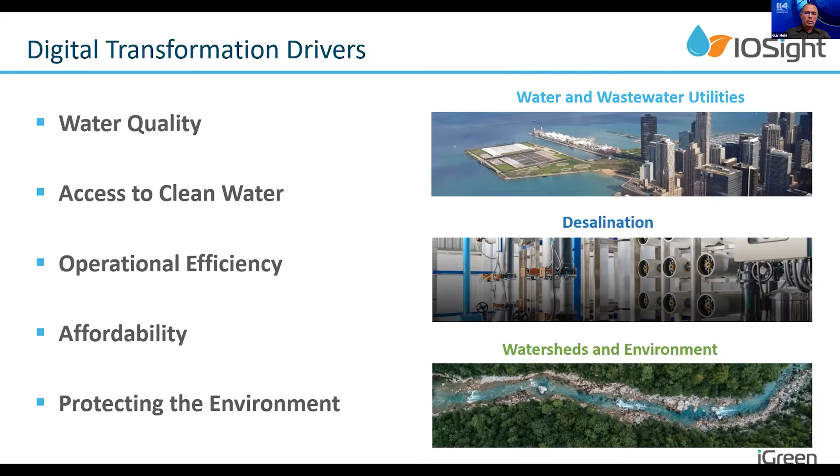All of these across the various entities in the ecosystem of water, like water and wastewater utilities, desalination plants that we know so well in Israel, watersheds and environmental agencies - all of them share these digital transformation drivers. On top of it, water also has industrial type, very complex, data-rich critical operations, for example wastewater treatment plants or desalination facilities.

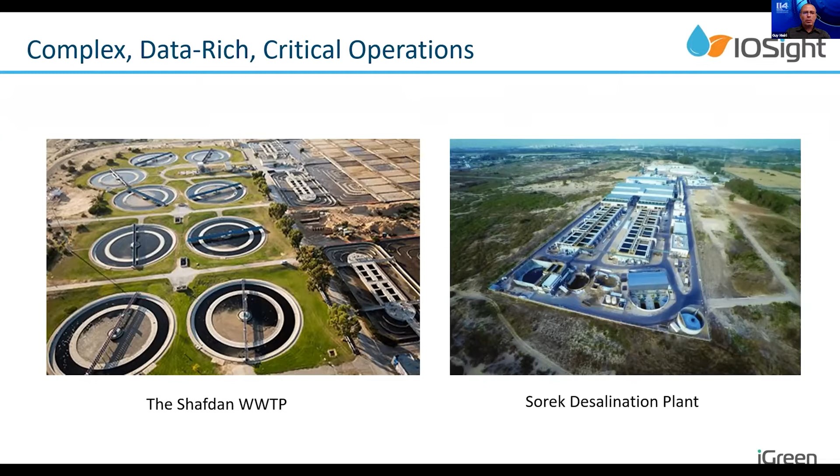We see here two examples that we have in Israel. So again, on that aspect, water is like any other industry - complex, data-rich organizations, facing the same challenges, like a lot of systems lacking synchronization. How do we turn data that we might have into insights, into decision support? All of these challenges we're going to talk about today.

Specifically, our company, that's what we do - IOSight. That's the only slide I'm going to have about our company. What we provide is data management and analytics for water entities, exactly for that - taking the data, arranging the data, cleansing it, and really serving it to support decisions across the organization.

The panelists that we have today, that you'll see in a minute, include Amir Riggs from Wessex Water in the UK, Ben Stanford from Hazen and Sawyer in the United States, David Malgay who manages the Hadera desalination plant in Israel, Ronen Schechter, the co-founder and CTO at Fluence, and Subir Bhattacharjee, who is the founder and CEO of Intelliflux Controls in the United States. I hope you enjoy this session.

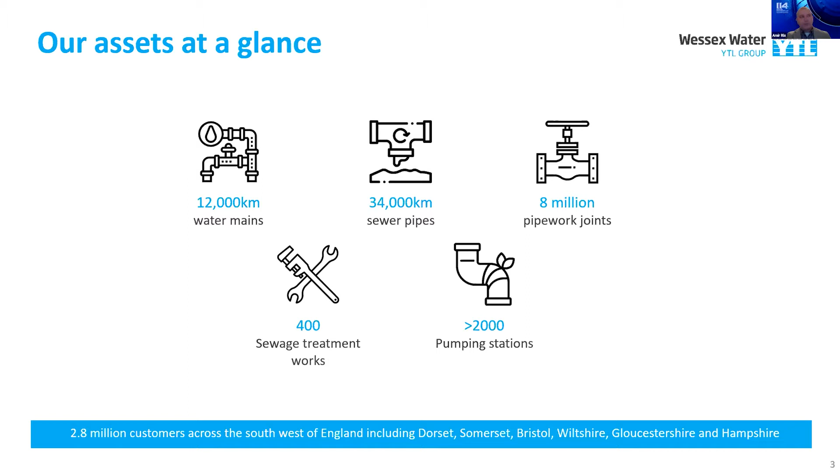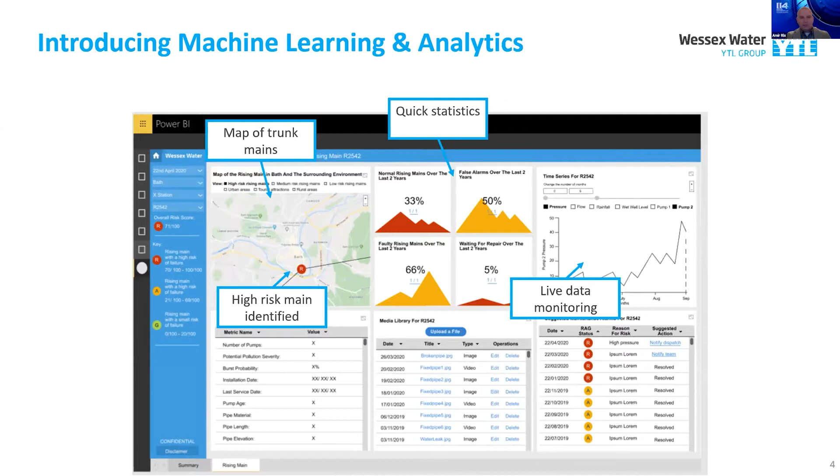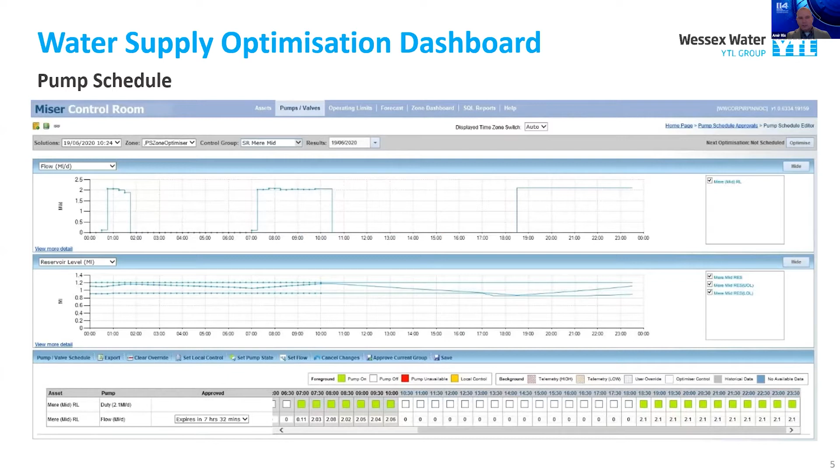Just looking at what Guy mentioned before, we are now looking into our digital transformation space, trying to make good use of machine learning and analytics. This is an example of a rising main bursts experiment and POC that we are running and showing good results. Here's our water supply optimization dashboard. So what I'm trying to present is the new technologies in our business, and this is just the beginning. We're looking forward to adopting many more of these.

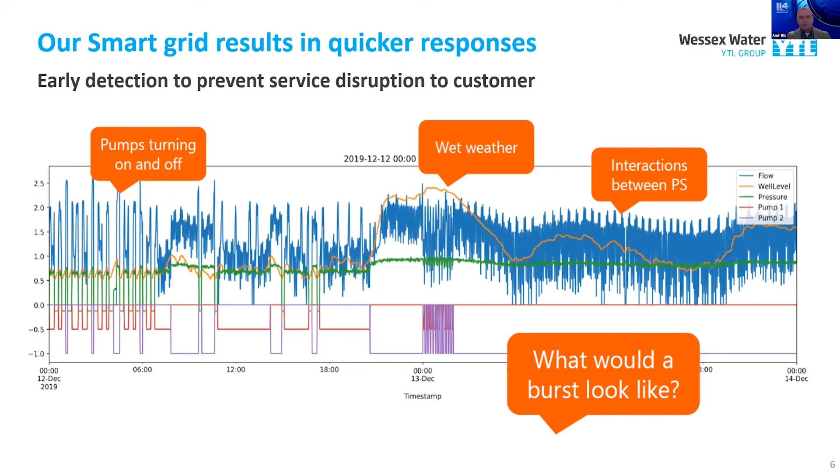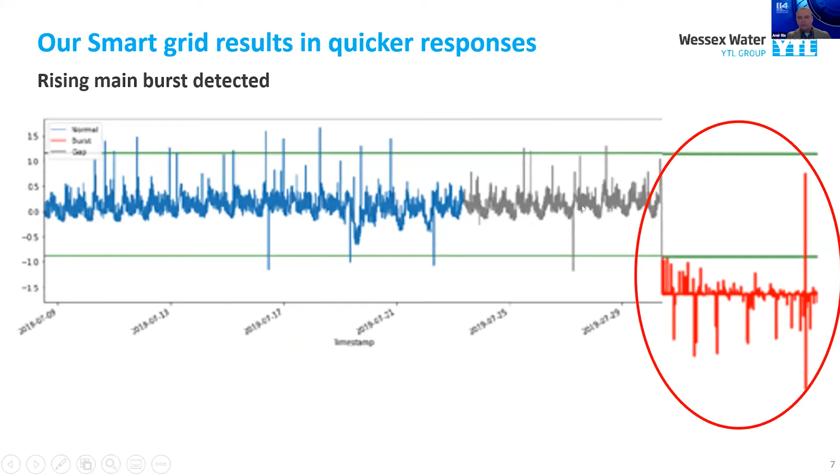Here you can see our smart grid results with its quick responses, where we try to early detect and prevent service disruptions. Here you can see an indication of a rising main burst that we identified using a machine learning model. This is a nice example of using machine learning on alarm analytics.

The control room gets hit in our kind of companies with hundreds, and sometimes thousands, of alarms, and human resources are scarce sometimes. We don't want to recruit more and more people. But on the other hand, we have more and more devices. The devices get more complex, and we get more alarms generated by them. So we need to control it better.

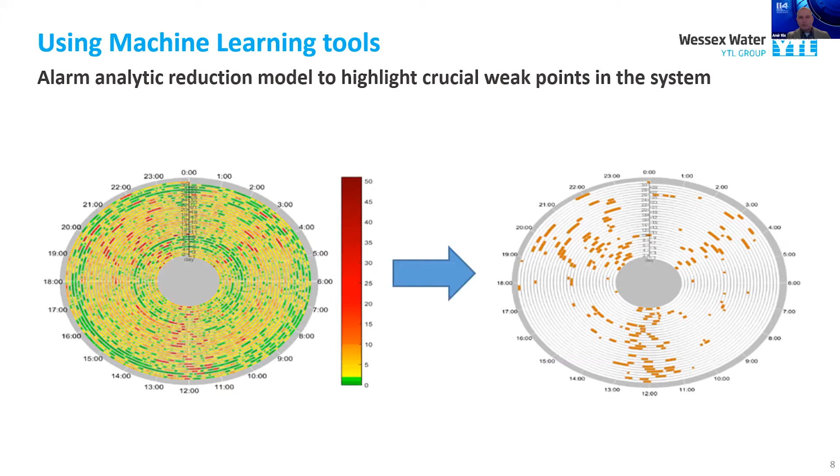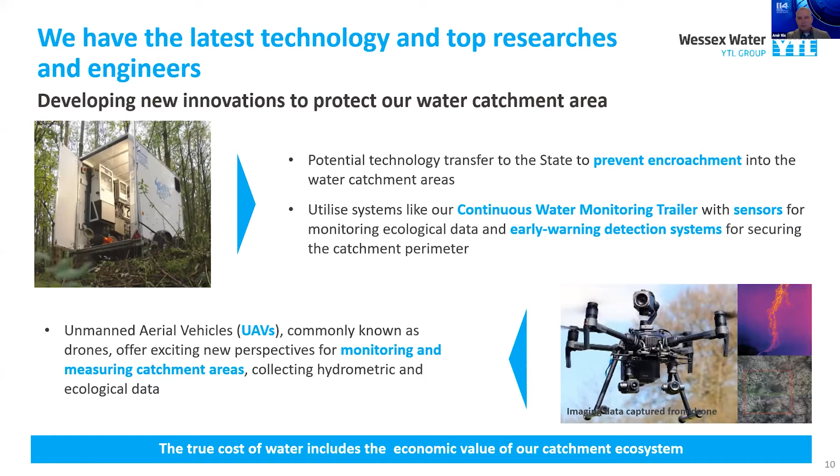Well, that's all for myself. I tried to be concise. I hope it was clear, and happy to join this panel, as I said before.

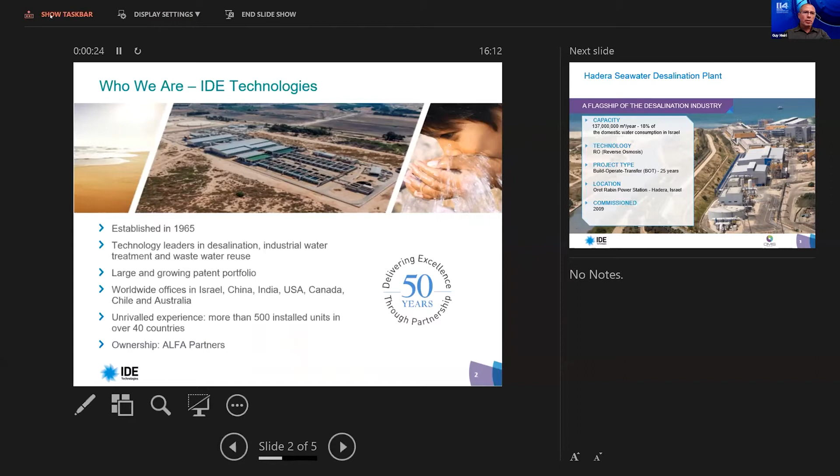David, please swap the display settings, swap between the screens, the top one. Go to the top, swap, the one next to it, the middle one, display settings, swap, exactly. Okay, sorry. That's all right.

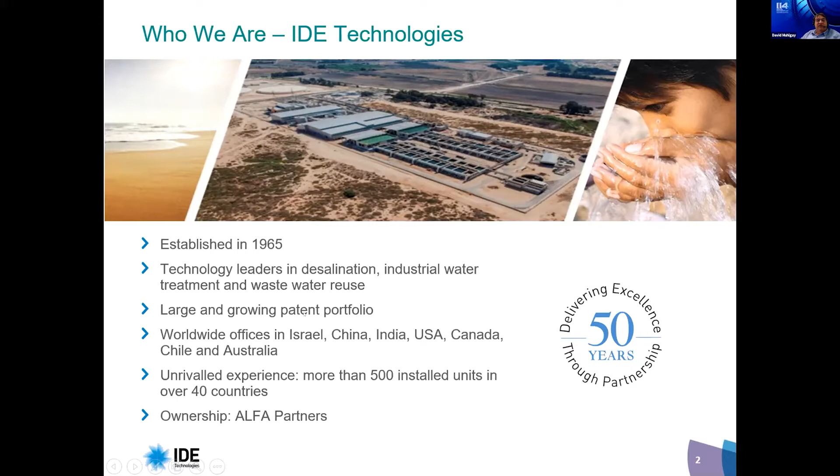IDE Technologies, established in 1965. In the 80s, the company was privatized. They lead technology in desalination, industrial water treatment, and wastewater reuse projects all over the world. They've got a very large and growing portfolio of patents. They're headquartered in Israel, with offices in China, India, USA, Canada, Chile, and Australia. They've got more than 500 installed units in over 40 countries, and the ownership today is ALFA Partnership Waters, after the company was bought out from ICL and Delek.

A bit about Hadera: the contractual capacity is today 137 million cubic meters of drinking water, about 18% of the domestic water consumption in Israel. It uses reverse osmosis technology, and it is a BOT project, a partnership between the private sector and the public sector over 25 years from conception. We are located in the compound of the Orot Rabin power station in Hadera, Israel, central Israel, and the plant was commissioned at the end of 2009.

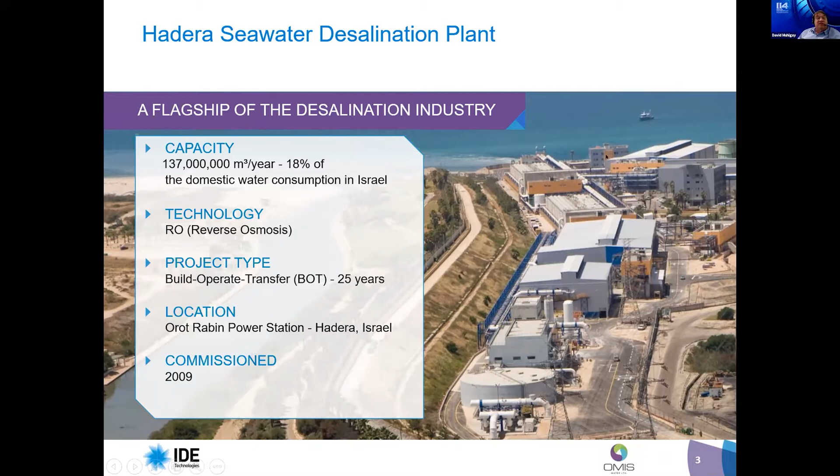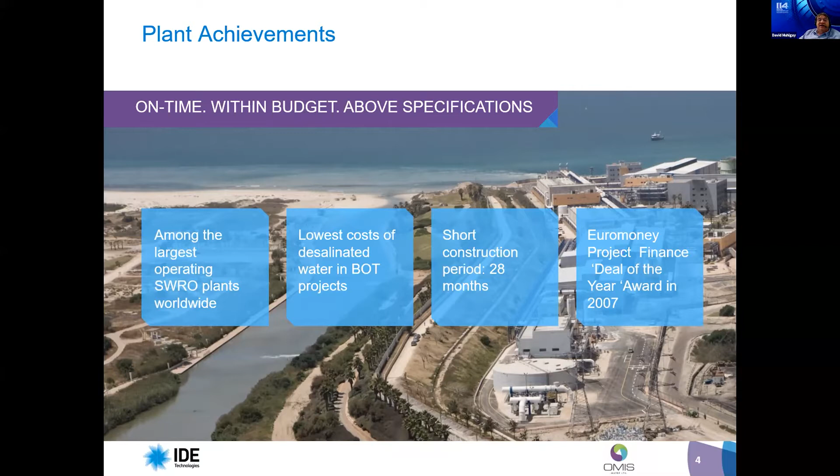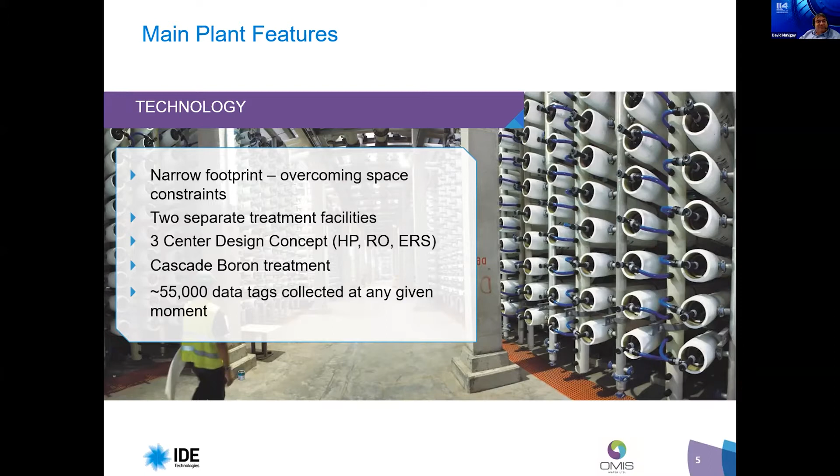I think the most important thing, especially for this event, is that we have at any given moment around 55,000 data tags which are collected online all the time, and we relate to those data tags. That's my presentation, and our challenge is how to get more out of those 55,000 data tags. It's something we're working on all the time. We've been working from the start on improving the way we relate to that data, and I think we're doing quite a good job.

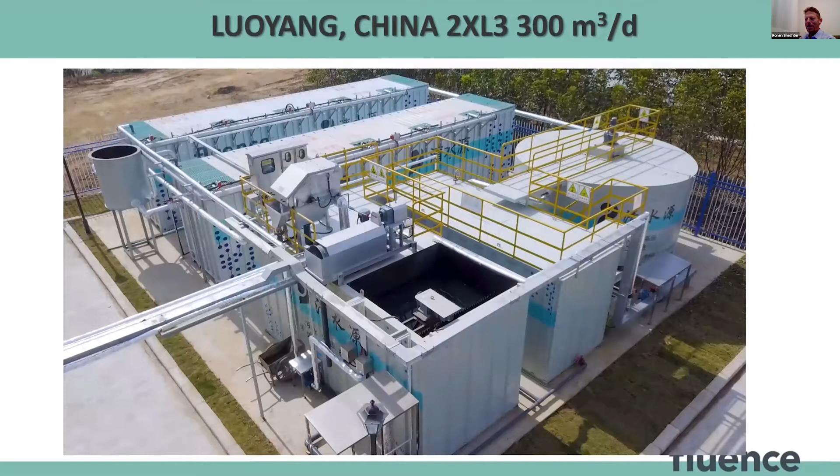Just to get us all up to speed, let's take a look at a few of them. I'll just run through, no details, it's all written there. These are decentralized systems in different places, different sizes. Nice thing is they're all based on the same building blocks. You see the containers—this is the heart of the system. Usually there's some building with the instrumentation, electricity, accessories and stuff, but the main building block is these containers. That's the concept we're promoting, and these are the decentralized systems.

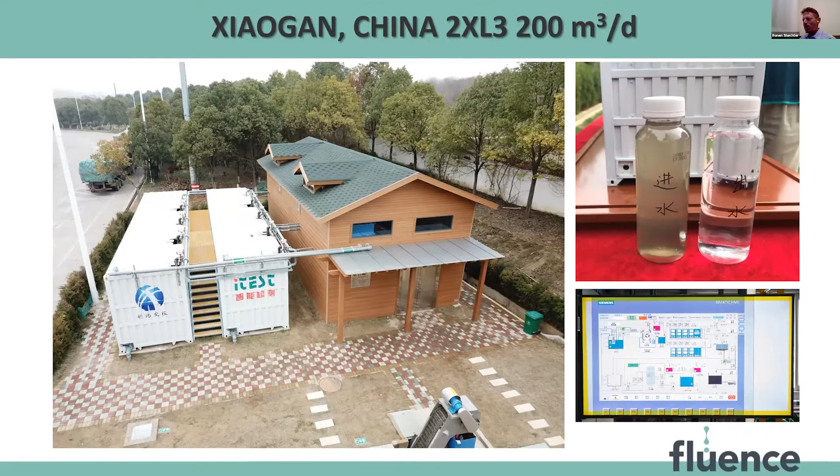So there are two edges, two opposite sides to planning a wastewater management system. One on the left is the centralized one—this is the most common approach for engineers globally. And there's the one on the right, where we have several decentralized systems instead of the centralized one for the same area or region. Each one has its own advantages.

The decentralized approach we're promoting has lower infrastructure costs. You can see there's much less piping and much less pumping of both the wastewater and the treated water back for reuse, so less energy for pumping. It is a very significant component in OpEx.

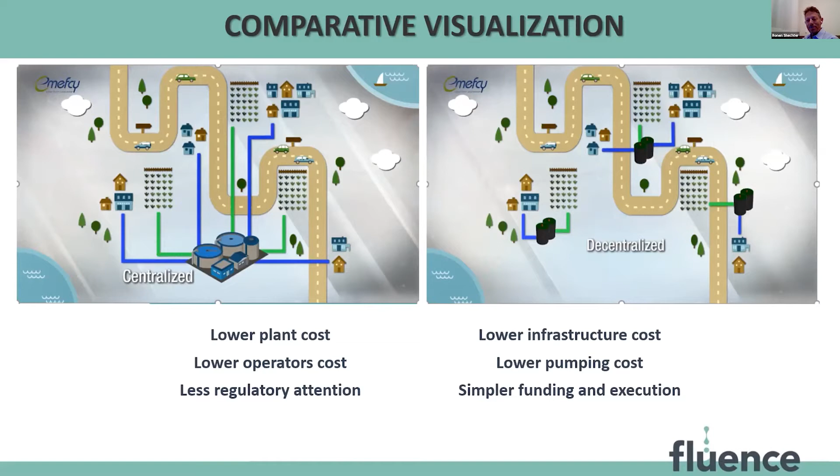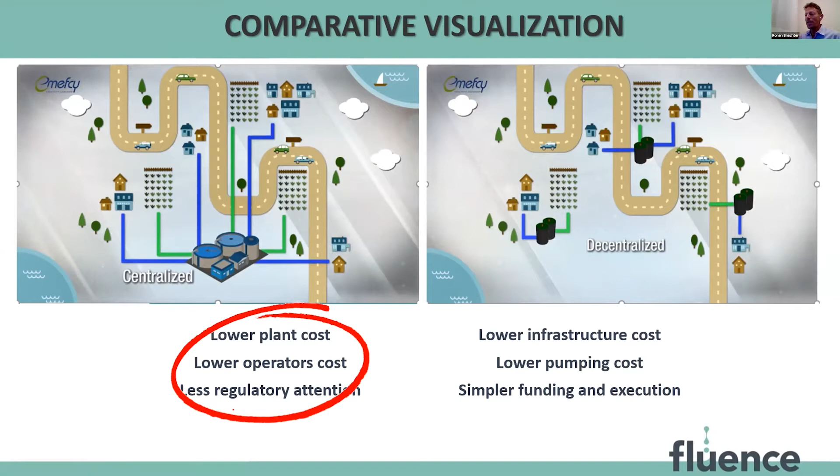On the other side, the centralized plant—one big plant—enjoys the economy of scale, so lower plant cost, lower equipment cost, and probably fewer operators because you can operate just one. Regulators like it too because it's just one plant to regulate. But I think technology, digital tools, and correct management can actually reduce or remove the advantages of centralized, and let decentralized meet all of these advantages just as well.

So why are we looking at this decentralized approach, and where is it going? One decentralized plant is less interesting. What I just showed, several plants providing the same service, is more interesting because it becomes complicated to operate. So why consider it at all? And the reason is just cost.

Look at the costs here. If we just compare scenario 3, which is completely distributed, shown on the left, and a centralized one shown on the right—this is actually a case study we did for where I used to live before, in Tivon, Israel. Comparing the life cycle costs of operating and investment, the distributed approach is almost 25% lower, or the centralized is actually 25% higher than the distributed one. So there is incentive to go there.

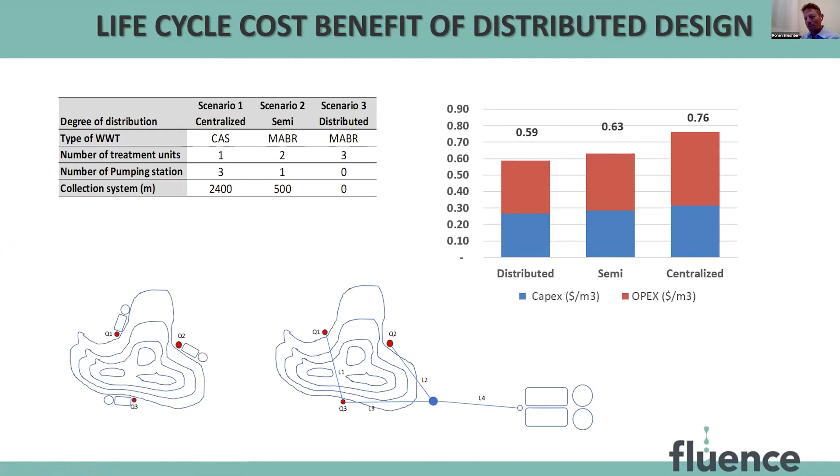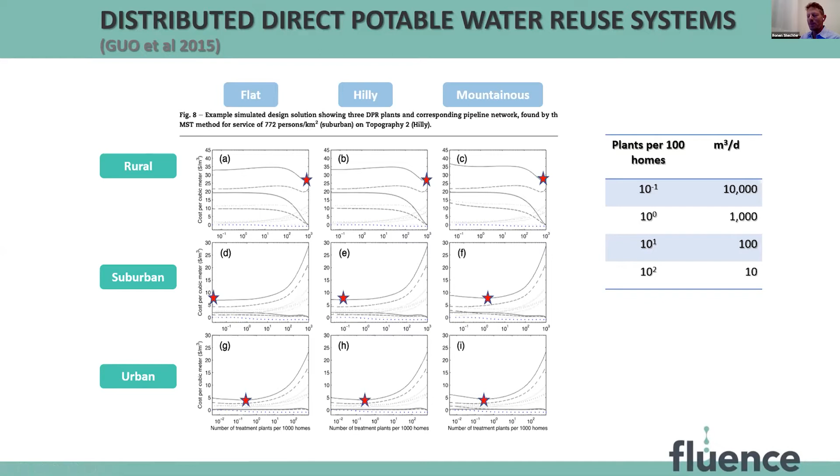I'm not the only one saying that. This is just one example of really many publications that I can share with anyone interested, how people actually calculate and simulate a very complicated combination, any combination of terrain like flat, hilly, or mountain, and population density, rural, suburban, or urban, to find the optimal cost. And you see that it varies. For the rural population, usually it's one plant per household, but surprisingly in the urban population, it is somewhere in the middle, something like 1,000, couple of thousand cubic meters per day per plant. So this is something being discussed because the cost is very attractive and a strong incentive.

But what are the challenges? Why is this not the default way that engineers go? Why do they still prefer and go to the centralized planning? So I think we're not there yet.

We need to get the concept of distributed treatment with centralized control, using a physical component and a digital component, offered as one solution together to become available for vendors and customers. Once this is possible, it will win on cost. This requires a partnership between the physical product providers and the digital component providers. So this partnership and development of a full integrated complete solution will actually support this transformation because there is a very strong cost incentive here.

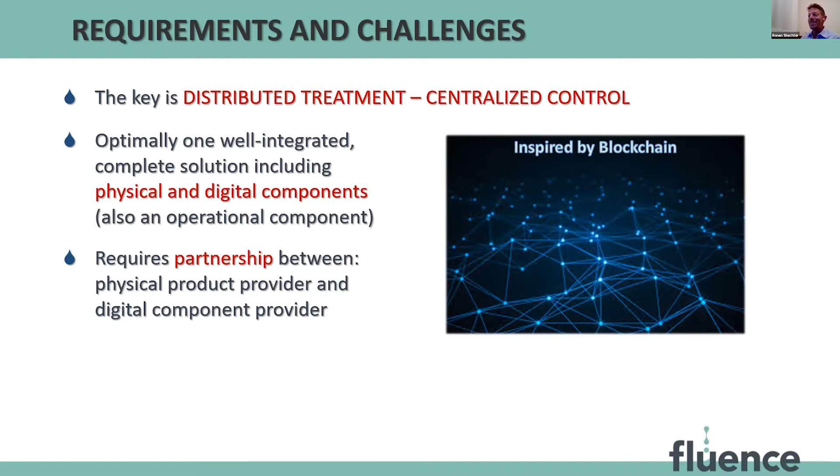So that's the point I wanted to make. And I see this in our future. It must happen because the advantage is so big. Thank you.

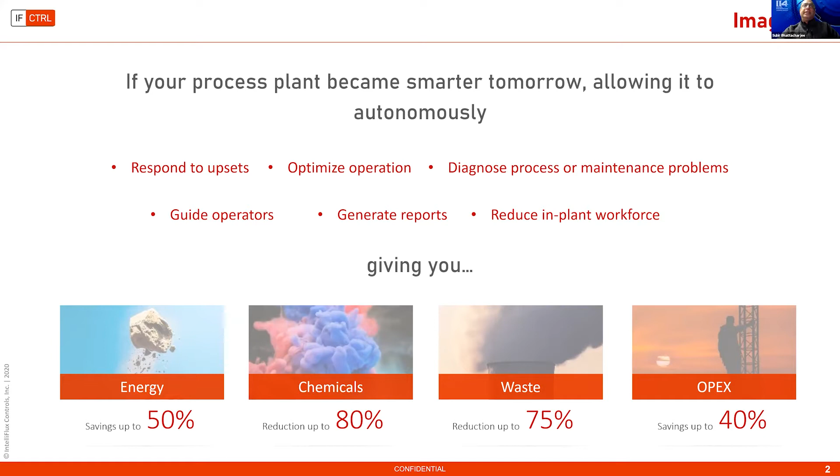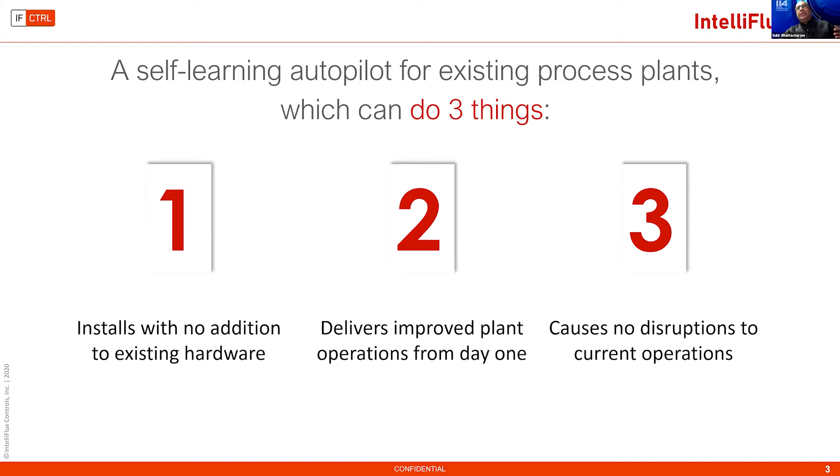So IntelliFlux went to deliver this PID loop closing system, and we developed a software-based plant operating system which can install on existing process plants pretty much with no addition to the plant hardware, delivers improved plant operations from the first day, and causes no disruption in the current operation. And in this exercise, as we are doing this for the last 3-4 years, we have been able to deliver process control.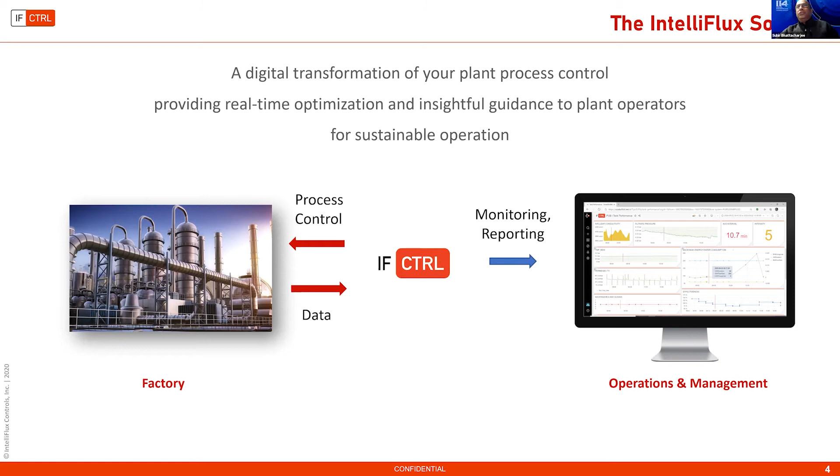We acquire data from the plant, but an interesting thing is that most of our customers pretty much focus on how can we see what the automation is doing. So we put in a lot of monitoring, analytics, and reporting to augment the basic process control PID loop closure that we are doing with our Smart SCADA platform.

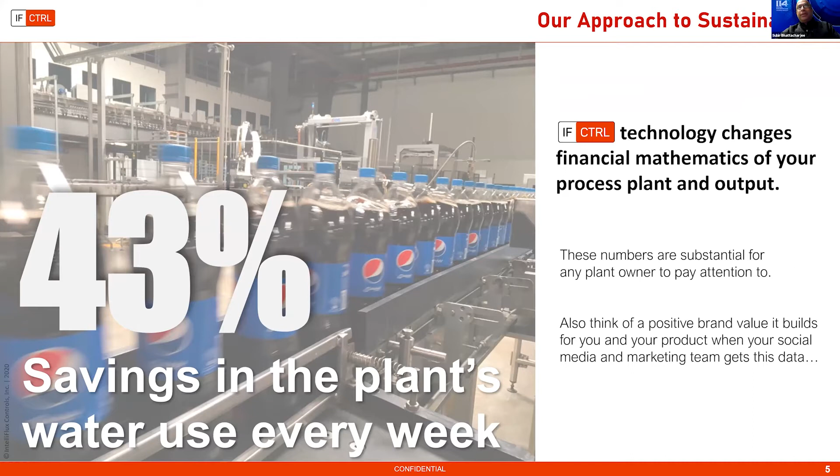The results are pretty obvious from what we have done. For food and beverage industry, in a beverage processing plant, we are routinely saving 40% plus water at the plant's filtration facilities and water treatment facilities. At a wastewater treatment plant in Middle East, we are saving about 32% energy based on reducing aeration demand and basically automating the aeration based on the COD and whatever the wastewater treatment process demand is.

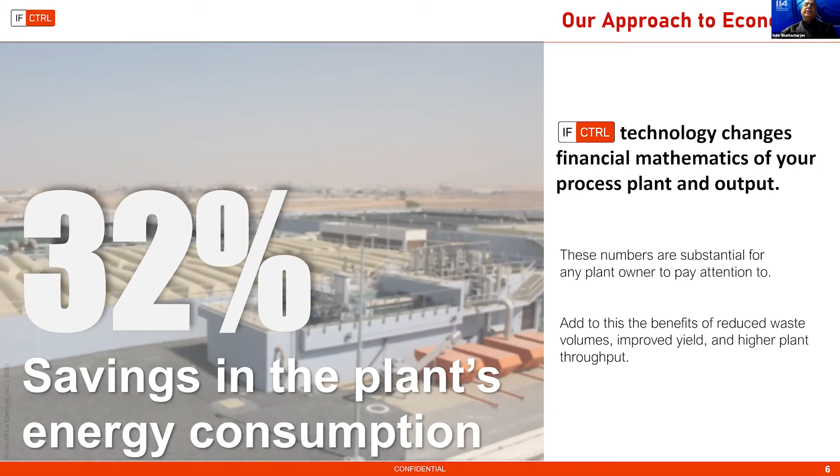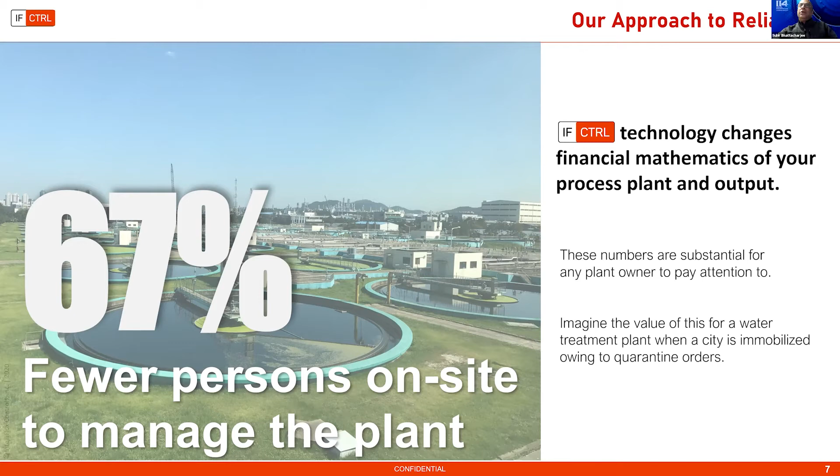During the recent COVID in South Korea, at a plant, we basically had the plant operating for weeks with about 67% fewer on-floor support staff, because the city's folks were quarantined. They could not go to the plant. They had IntelliFlux installed, and they basically could monitor the plant remotely. They were seeing normal operations, and operators only went in when consumables needed to be filled in or any maintenance alarms were set up. So these are the small examples of implementation of what we call the cyber-physical loop closure with improved automation, that is the ultimate goal of Industry 4.0 in the water business.

And a lot of the sustainability divisions in corporate water management across global companies, as well as water utilities, are warming up to our idea.

And we are working with this. As a startup, we are at the bottom of the food chain, but we are working to become a leader in terms of getting the ideas of intelligent automation and fluid robotics for the chemical process industries into the water treatment business. So I'm looking forward to the discussion.

And again, Guy, thank you for making me a part of this panel. Thank you, Subir. It was very interesting.

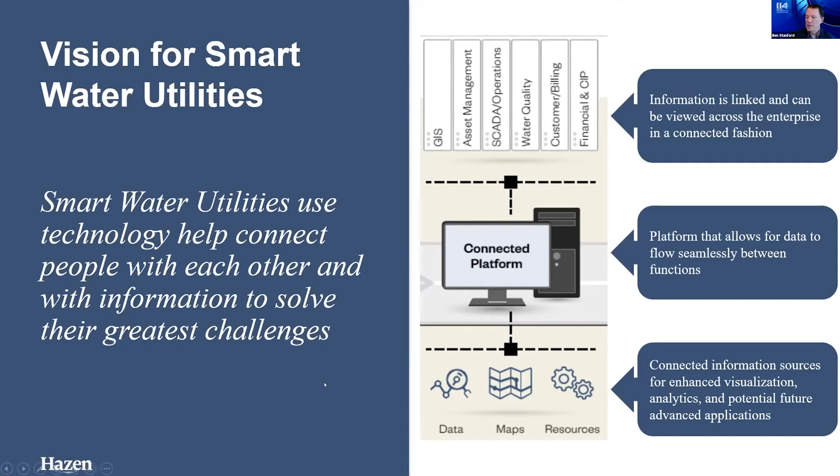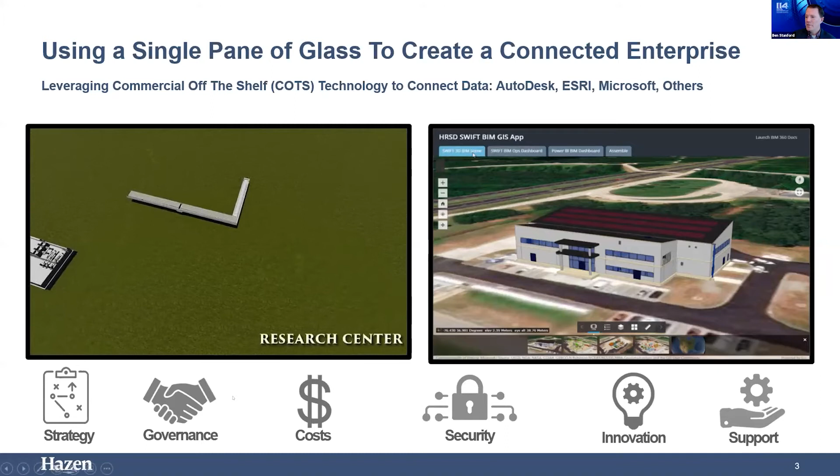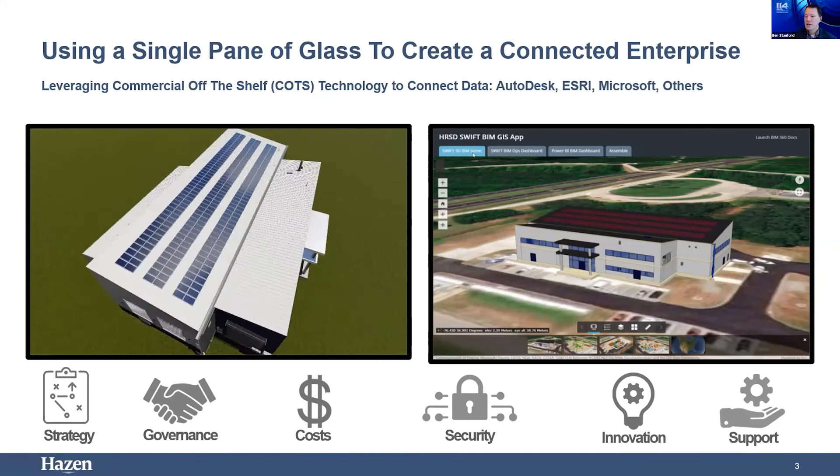And what we're doing is bringing in the data that they already have through a single portal. So we're looking at the building information models, the Revit files, whether it's a 3D one like this one, or whether it's a 2D CAD drawing. We're bringing that together so that when the utility is designing or looking at the facility and facility options, they can actually get a better feel for what that's going to look like, how that's going to be imagined when they're in it.

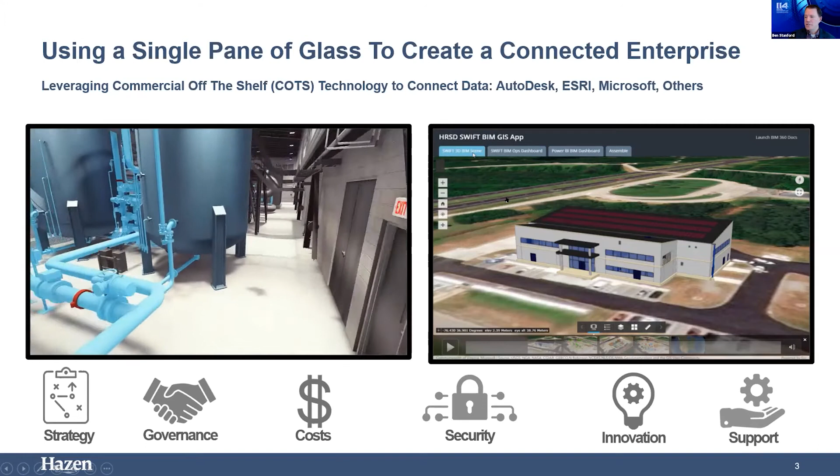And then bringing that right over into the single pane of glass concept, where they can now take their information models, and as they're being edited and commented on, they can use products like Assemble, which you see over this tab on the right, where they can actually gather and capture that information. The reason that's important is that as you build the facility, inevitably there are going to be changes. Different equipment's brought in, different pipe sizes, whatever, and we want to be able to capture that. So the single pane of glass concept is really all about bringing these assets together.

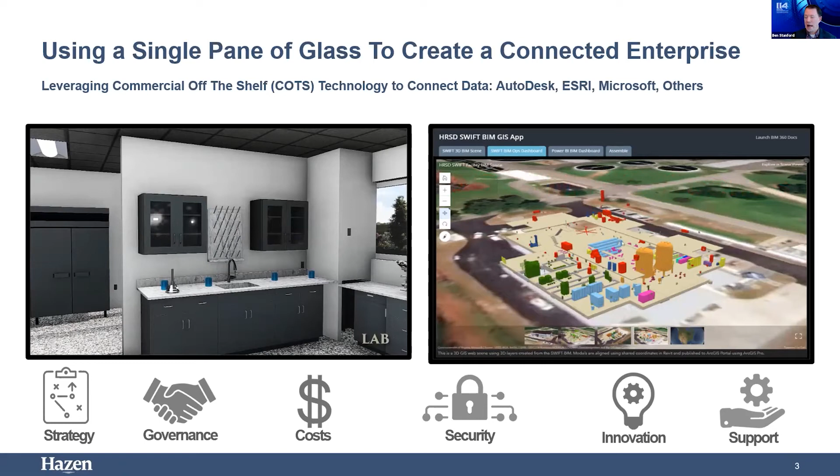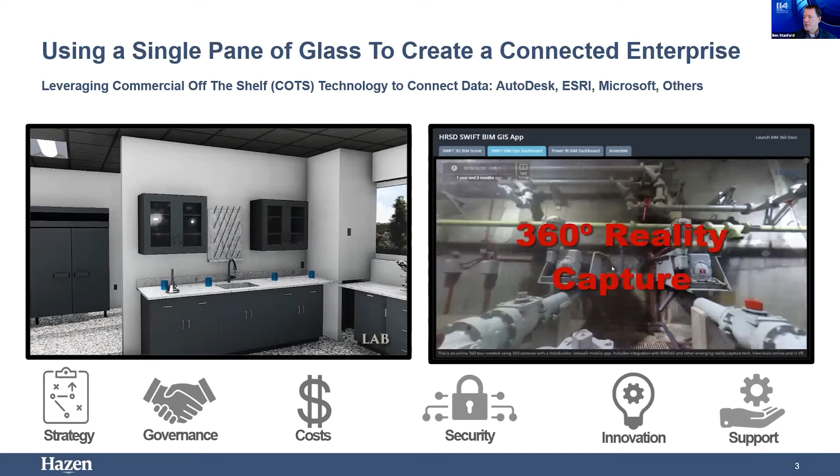So it's pulling the geographic information system so you can look at multiple facilities. For this particular utility, they have 7 wastewater treatment plants. You can use that CAD file for understanding the facility, understanding critical assets. You can color code them. You can understand what's happening with them. You can use that for training. You can also use 360-degree photos inside new facilities, inside old facilities to understand, again, for training, for confined space entry, whatever you need to be able to understand what's happening there.

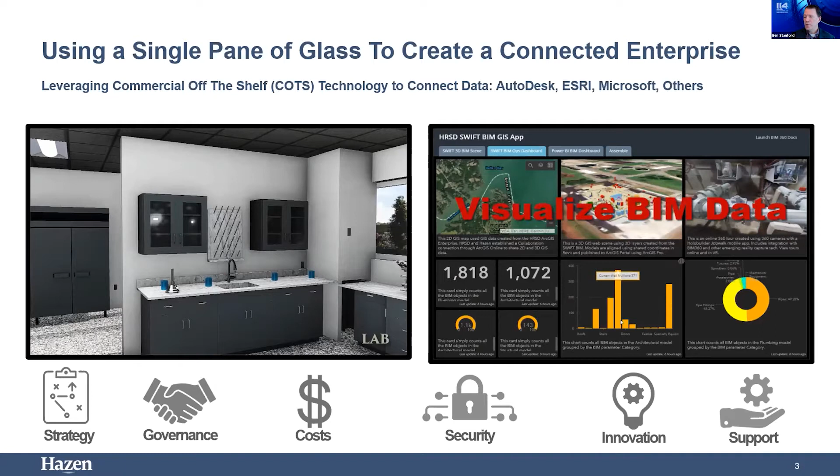And then lastly, tying in dashboards where we have better control of the assets, the computerized maintenance and management systems, and then of course things like the Power BI dashboard as well. So it's really a great way to pull all of these processes together, but the way that you do that is through a strategy. So it's understanding what are the key things that you want to address, how do you manage the data, how do you use that in a way that's cost effective and provides the best stewardship of the resources for the utility. Of course, making sure security is there, being innovative in that approach, and then providing support.

So that last piece is really important in that we use entirely commercial off-the-shelf technologies. We're not building anything new. We're just using the inherent capabilities of those technologies to bring those processes, bring those people together, so that rather than opening 5 or 6 or 7 different programs, you can, again, go through this single pane of glass concept.

So when we think about that, it's all about the strategy and understanding what those benefits are. From the utility space, whether that's a water utility or power utility, you're looking at improved operations, improved efficiency, improved reliability. You're looking at better decision making.

You're looking at understanding what those key performance indicators are and providing a way to act on those, so that as you move forward, the alarms or whatever it is can be dealt with in a way that's increasingly efficient, increasingly productive.

Improve your asset management and maintenance systems. That strategy really lets you develop the future-focused IT infrastructure so that you have the capability to do single pane of glass applications. You want to create an innovation culture.

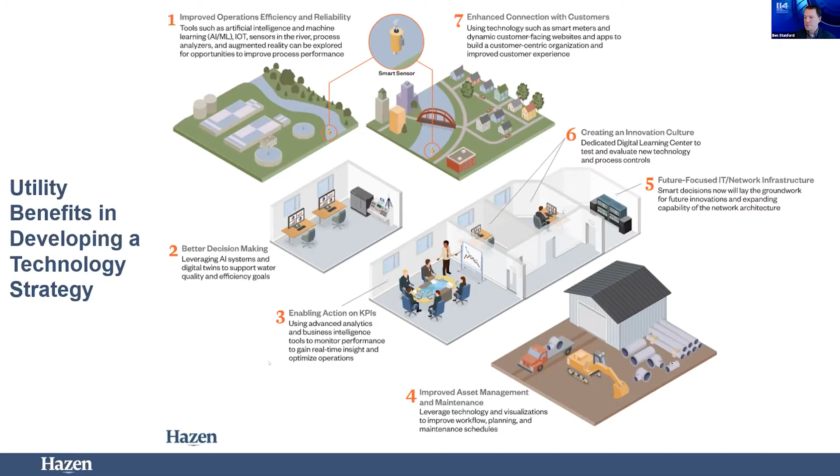That means everybody's thinking ahead and thinking about how to bring these pieces together. And then lastly, you want to enhance your connection with customers, whether those are internal, the different groups within the utility, or your external customers. So that's just a brief view of our thoughts on innovation and how we want to pull that together.